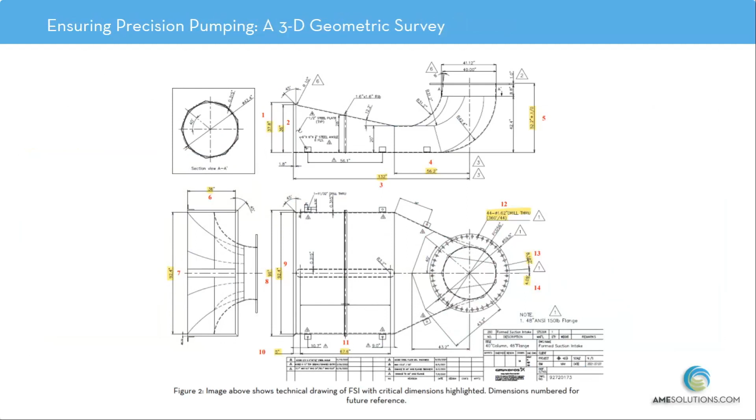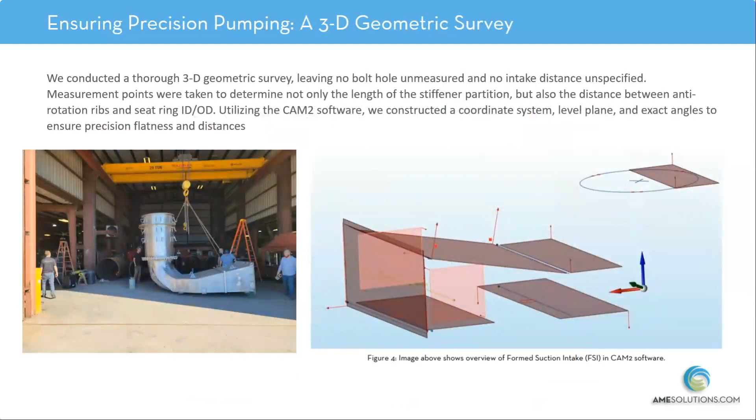So we put all of our measured distances, what the distances were supposed to be in accordance with the drawing, and then the deviation. We submitted all of this information to the manufacturer for approval to deploy into the field, essentially.

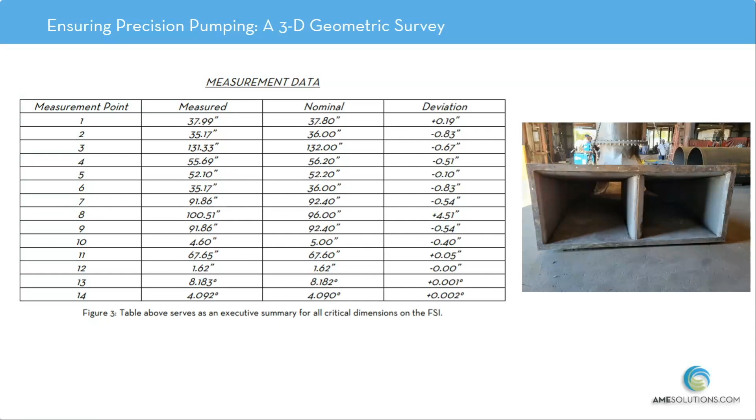So this is the second component. The first picture actually showed the full assembly. This piece is actually the one that goes on top, and this is called the discharge column.

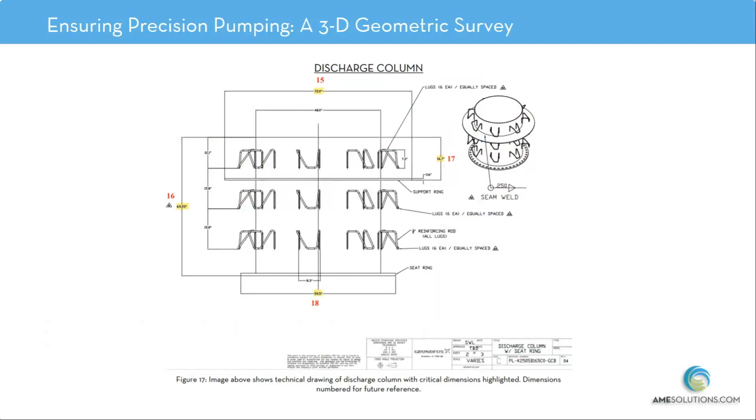So this is our laser tracker. This is the equipment that we were using for all of these case studies. It is made by a company called Faro.

This actually has the ability to move positions. So you're able to change your reference by establishing reference points in the world, and then measure that before you start taking any measurements. And if you end up having to move the device, you can key back into those reference points, and it will reestablish where it is in that world before you start taking more measurements.

So the reason I bring that up is because you can see here the way it's staged, we're only going to be able to measure that one side. So what we did is we measured reference points all around it, took those reference points in space, and then moved the device to the other side where those bolt holes are in the back there. That's how we measured the bottom faces.

These are a couple more of the points that we needed to take. It was asking for the diameter of the bolt holes, the angle between the bolt holes, and all that good stuff. And then this little picture on the left is going to show the motor inside of that discharge column.

So what was kind of nice about this is we actually did have to advise on some corrections. I'm not sure how well you guys can see it, but inside of that cylinder, there's a flange face, and that flatness callout was actually out of spec. So we worked with the fabrication shop to machine down the high areas and then remeasured it until it was satisfactory.

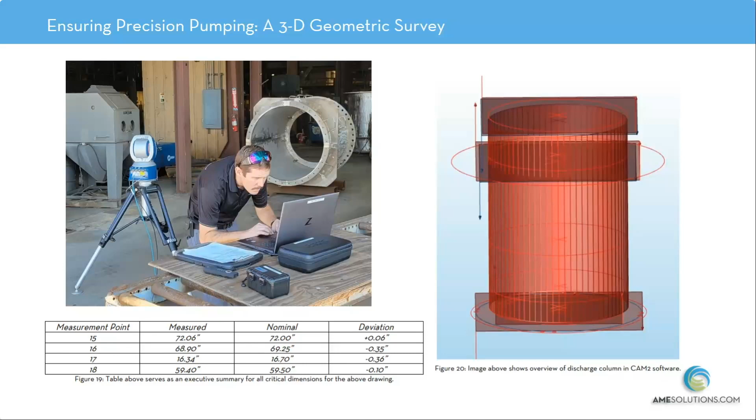And that was pretty much the only error that we were able to identify in accordance with the manufacturer's drawing. And as far as I know, they delivered it successfully to the client.

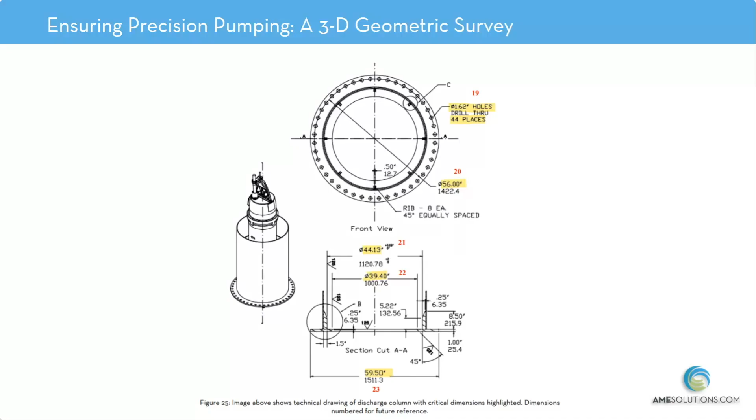Okay, so the second case study is at an actual pumping station. Some of the background on this one, the piping is about 10 feet in diameter. It's a very large pump. And they were having structural cracks form in the piping.

So the pump manufacturer's representative reached out to us to try and confirm some of the drawings or some of the dimensions from the drawings. So they took out all of the pump, all of the bearings, all of the impeller shafting, the impeller.

So we ended up having to measure some flatness of each individual bearing foot. And then we had to measure that flatness to a best fit plane of all 4 feet to establish that there's no soft foot going on.

They asked us to measure the plumbness of that flange as well as the discharge flange. There's also these bolt hole locations on that flange, and there was also some dowel pins in that flange to align everything.

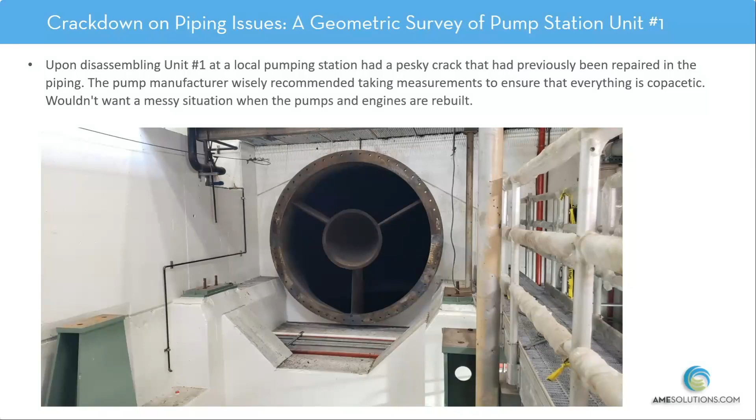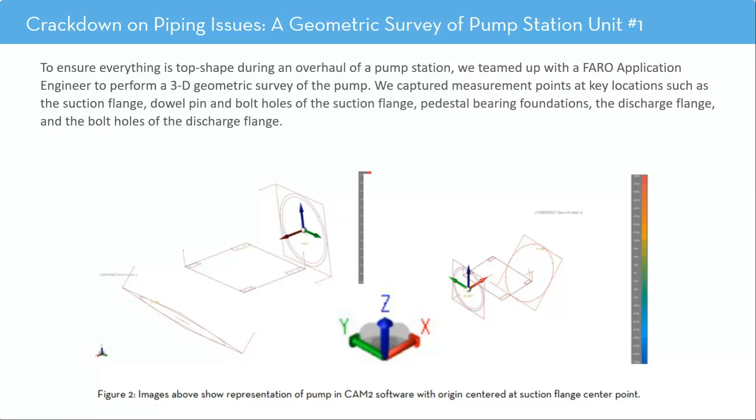Okay, so this is a picture from the other direction, looking the other way. So that's the discharge flange going down at a 45-degree angle.

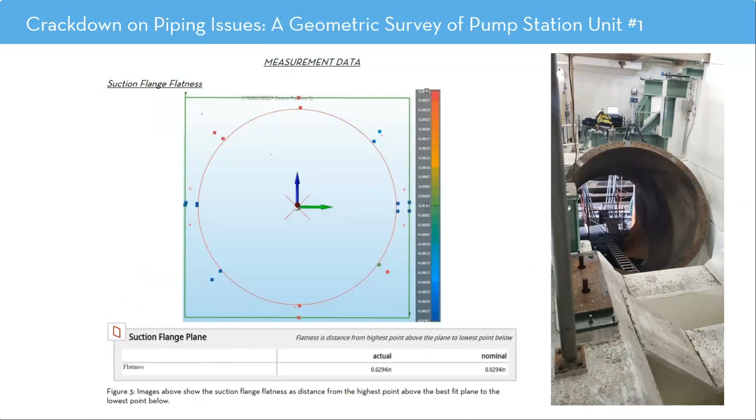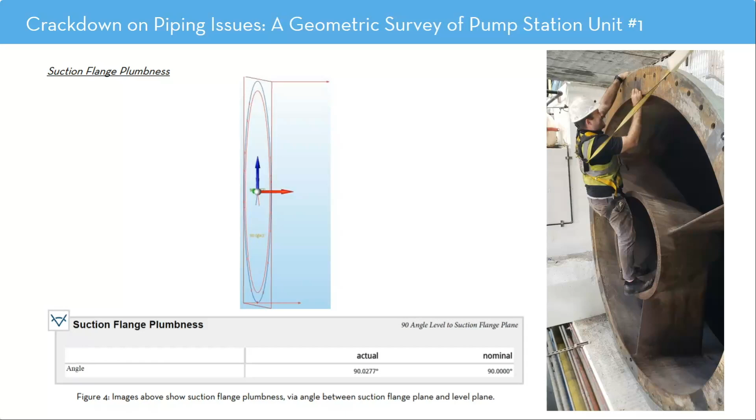So the X is actually going to be looking into the screen. Our Y is going to be side to side, that would be our normal X if we're looking at a 2D. And then our Z would be our actual Y coordinate system in the 2D plane here.

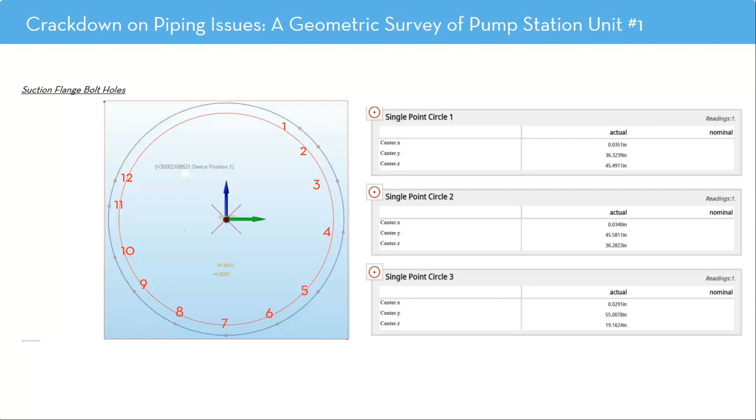This is another measurement that they requested that we make. This is another key feature to this software and what it's able to unlock essentially.

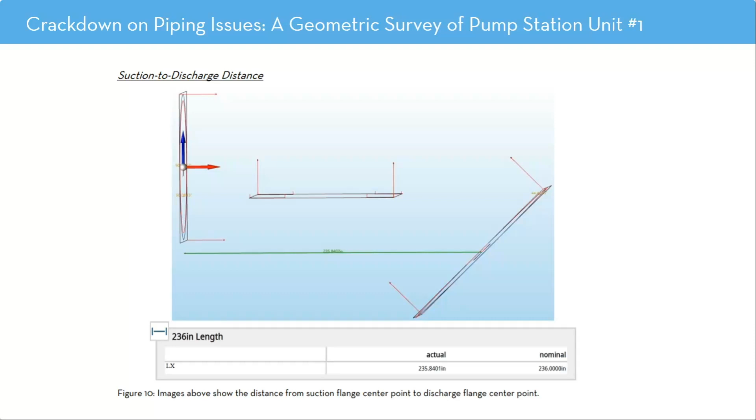So again, same thing, we took all of our measurements. We established our coordinate system based off of what our plane of interest is. And then we were able to use those GD&T features in the software to establish flatness, perpendicularity, parallelism of all of our features of interest, so to speak. And then we were able to compile all of this into a report and present it to our customer. Again, happy customer, happy end product.

Okay, the last case study I have right now is we got a call from a partner of ours who works heavily in the commercial marine industry. There was a tugboat that ran aground, it hit bottom. These tugboats have something called azimuth thrusters - it's essentially a transmission going into a down right angle gear. Then that shaft goes into another right angle gear that the propeller gets mounted to.

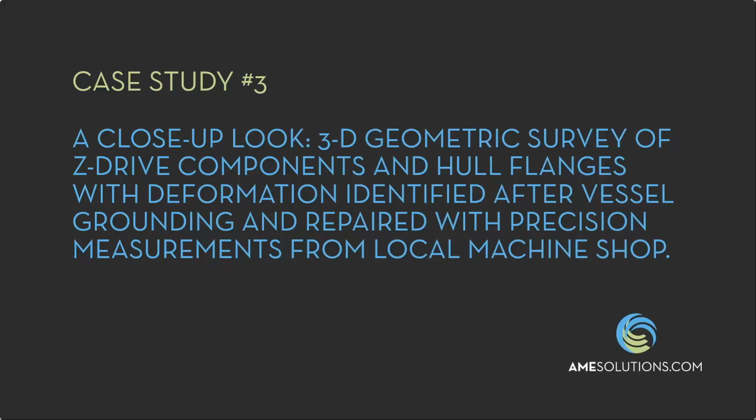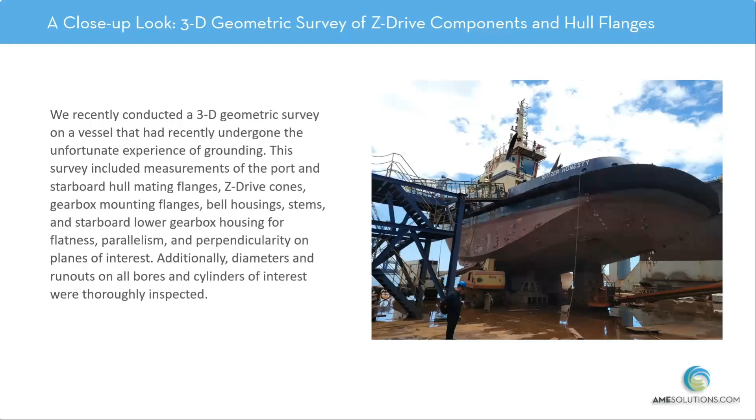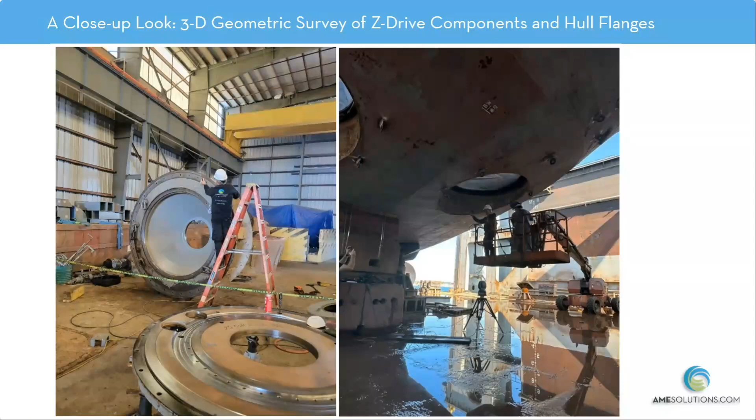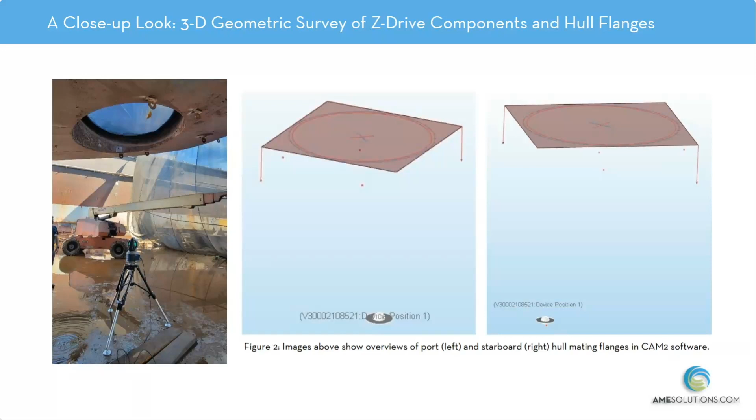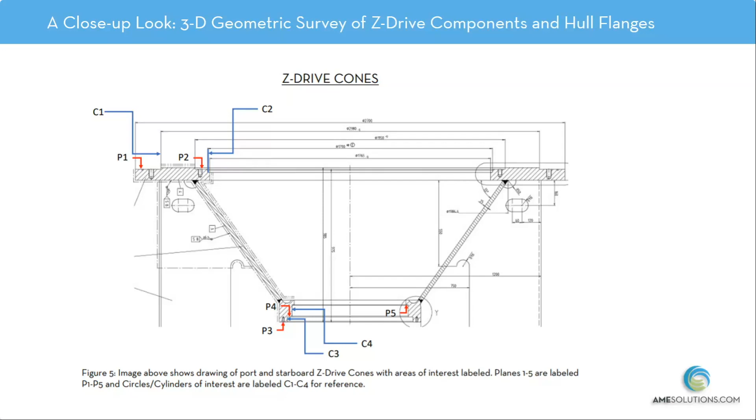Like I mentioned in the first case study, this equipment allows us to move locations to gain line of sight to every aspect of the component. In the surrounding structure, there are a few structural beams that we were able to mount our reference points to, and we measured that before we took any measurements.

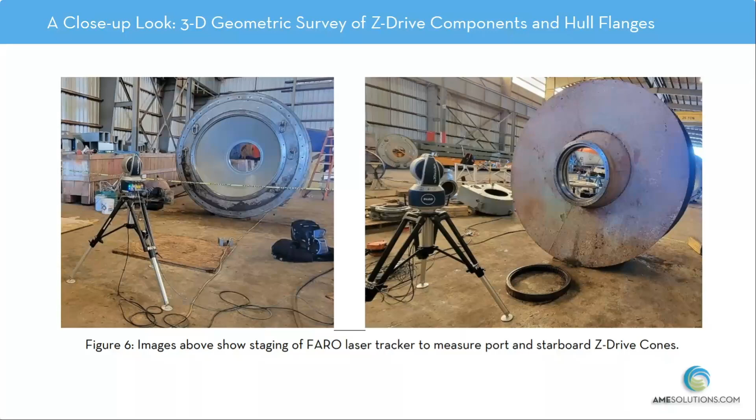Again, we were measuring the flatness, perpendicularity, and parallelism of the planes, as well as the diameters and runouts of the circles and cylinders labeled in blue there.

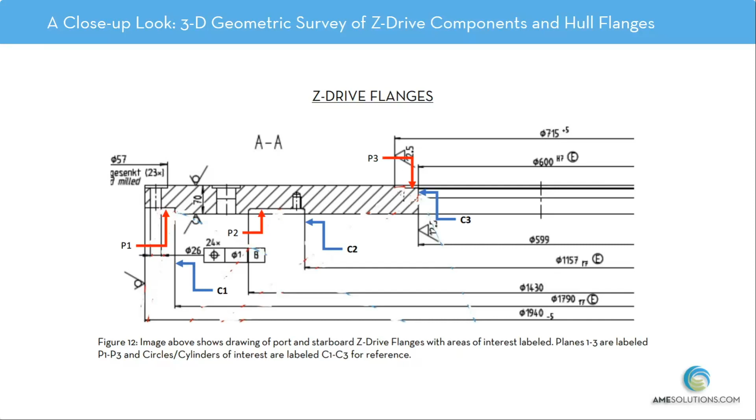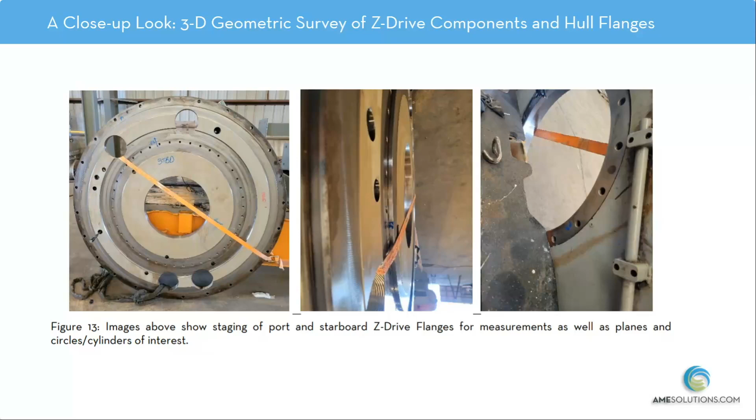What was interesting in this, and I don't have a visual aid for it, is that the Faro laser tracker actually has an integral thermocouple that plugs into it. That thermocouple is constantly reading the environmental conditions of the area you're measuring in. This particular area was covered, but it was still outdoors and not climate controlled.

What was very helpful was we were able to look and see what the actual temperature was while we were making this measurement. The manufacturer came back on our initial report questioning some of the diameters we measured, saying it just wasn't possible in reference to their drawing.

After digging back into the software and doing a deep dive into the data, we determined that the drawing—some people may not know this, I know I didn't at the time—but when looking at a technical drawing of a component, all dimensions, unless stated otherwise, are assumed to be taken at 20 degrees Celsius.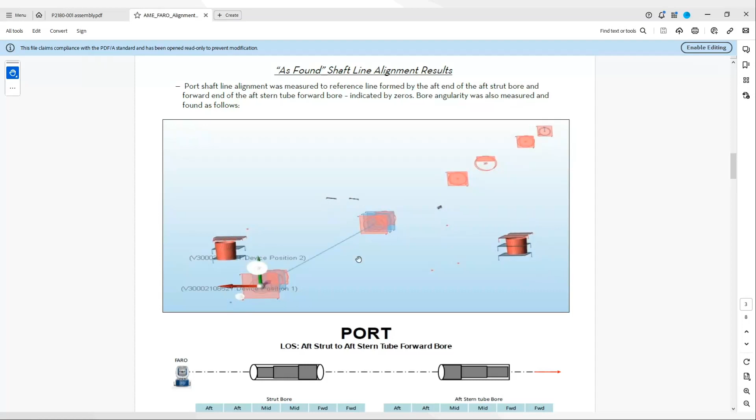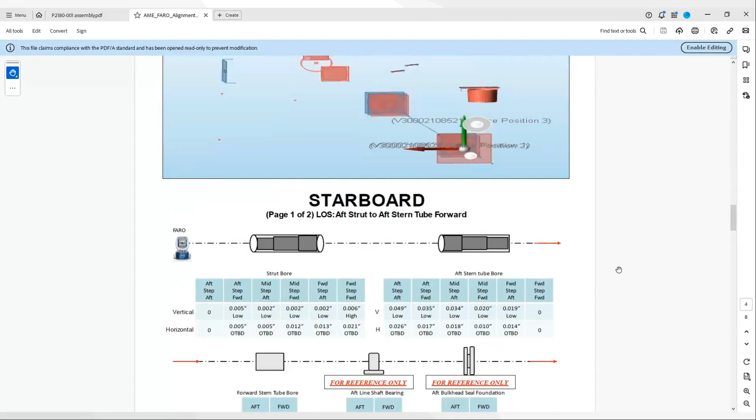We were also asked to do some dimensional verifications. If you look here, that's our port rudder post and starboard rudder post, and then these were the center lines and other areas they asked us to measure heights to. These are the alignment results. This was the other side here. We measured both rudders on one file because they asked us to do the distance between the two. For this one, we only needed to do the one. These were the results there.

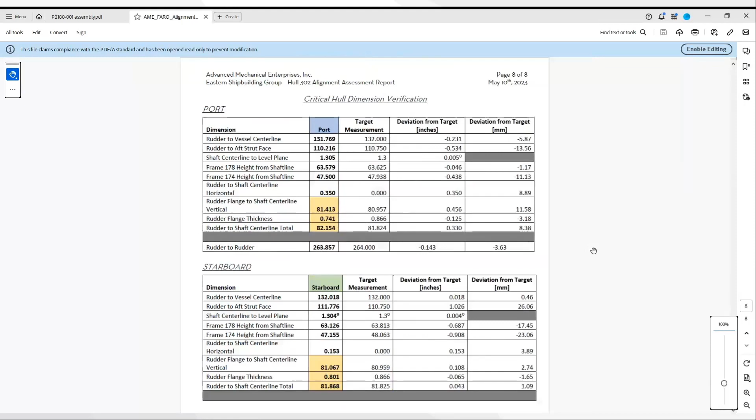This right here were the dimensional verifications they asked us to check. So we did our targets, the deviation from the targets, the target measurement being our nominal values. And then they wanted to measure the shaft center line to level, all that good stuff.